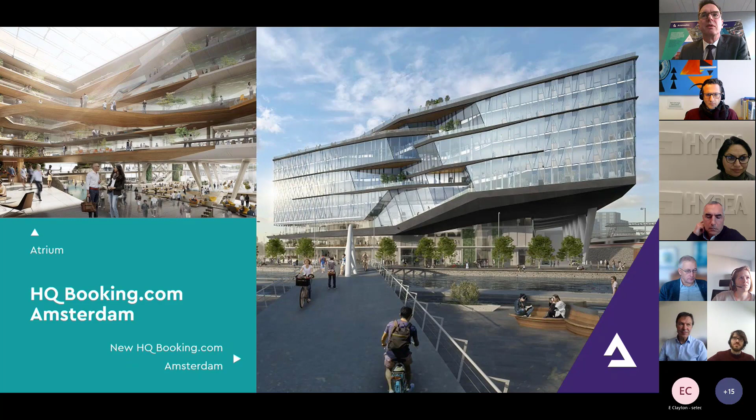And a bank, the Triodos Bank in Zeist. This is a timber structure, this is one of them. It was already one of the most sustainable buildings in the Netherlands. It is surpassed by different buildings at the moment, mainly because they're built in wood and timber.

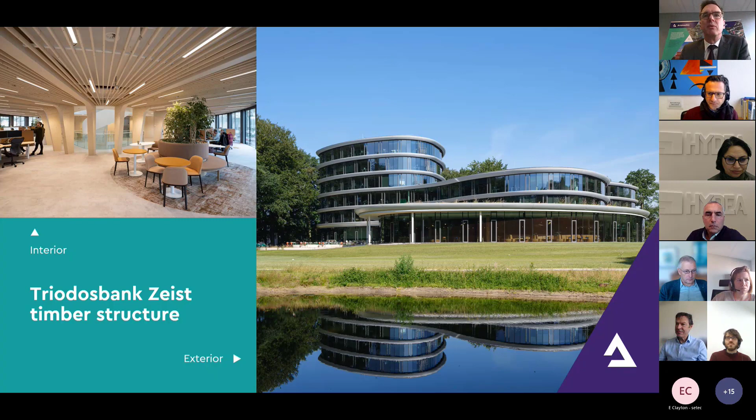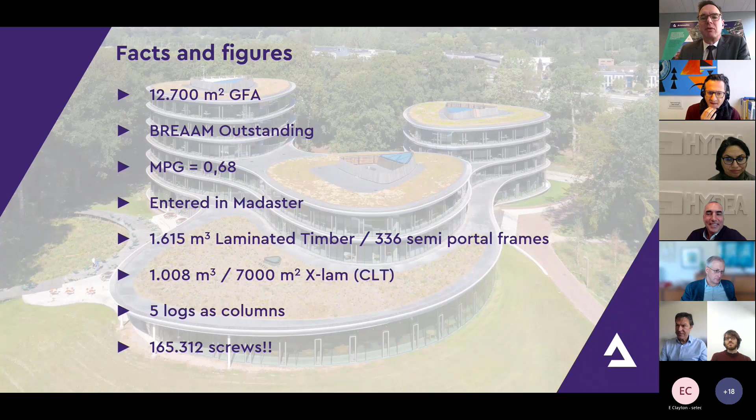Some facts and figures about this building, which will come up later as well. It's a lot of wood, but it's also because it's supposed to be remountable, but it's put together with 165,000 screws. So you can think about disassembly when you have to unleash all those screws.

So what is mandatory in the Netherlands regarding sustainability and circularity? The government has set goals, and we want to transfer the entire economy to a circular economy, and that has to be completed in 2050. This means no waste after that year, and we should be halfway around 2030. We're at the moment in 2023, and I'm not sure if that's one of the questions where we are at the moment.

The basic principle of this policy is that we use the R10 philosophy. Maybe it's known in other countries as well, but it's a way to think about circularity. So with R1 to R10, R10 is dumping and landfill. The higher the number, the lower the circularity. So the first one is refuse - maybe we shouldn't build anything at all.

Rethink is can we do things smarter, and reduce - if you build something, try to do it with minimum material as possible. What we're talking about are the numbers R3 till R7. R8, of course, is also one, but that's recycling, putting steel beams - it's the worst form of reusing.

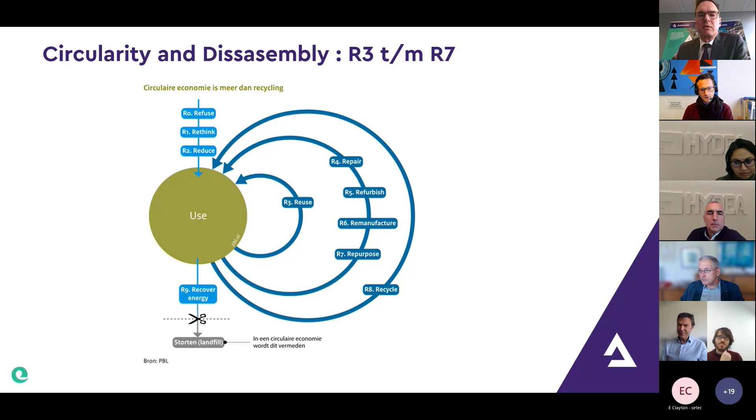Because it's bringing a steel beam to melt it down to make a new beam. But you can imagine that reusing a product or component in a building without adjusting it is the best way to do it. And R4 to R7 are different grades of reuse, with adjusting the product a bit or more.

What sustainability goals have landed in the building code? So the code that we need to meet to get a building permit. The first one is energy consumption - I don't want to say too much about it because it's not my field of expertise. But for new buildings, they have to be BENG buildings. BENG stands for almost energy neutral building - bijna energie-neutraal gebouw in Dutch.

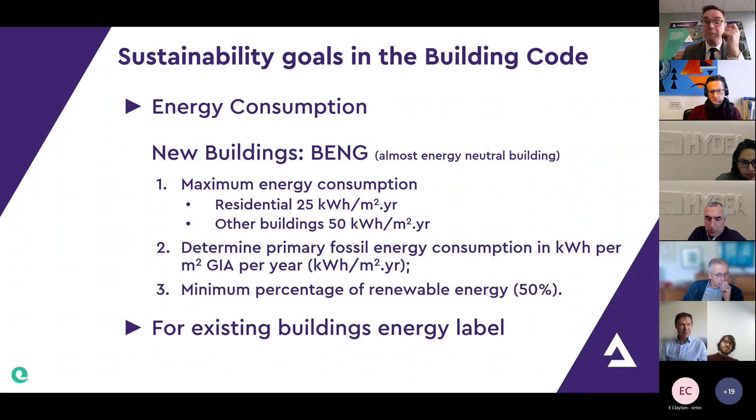This means that for residential buildings, the energy consumption must be maximum 25 kilowatt hours per square meter GFA per year, and for normal buildings it can be double. You need to determine the amount of primary fossil energy, and you have to have a minimum percentage of renewable energy, 50%. Most of the time it's PV panels in nowadays practice, but also energy from windmills or biomass, for instance. For existing buildings, there's an energy label, mandatory, but not going into that one.

And if you look at material use, that's where we, as a structural engineering company, come in, and also a project management company come in, for new residential buildings and offices. Other buildings get their own requirements later, is an MPG of 0.8, and I will explain later what that means.

But MPG is key and stands for the environmental impact of performance of buildings - oh, I see there's a typo. So it's how good the building performs on a sustainability level. But in 2030, this should be 0.5, and there's even the wish to bring it back to 0.3.

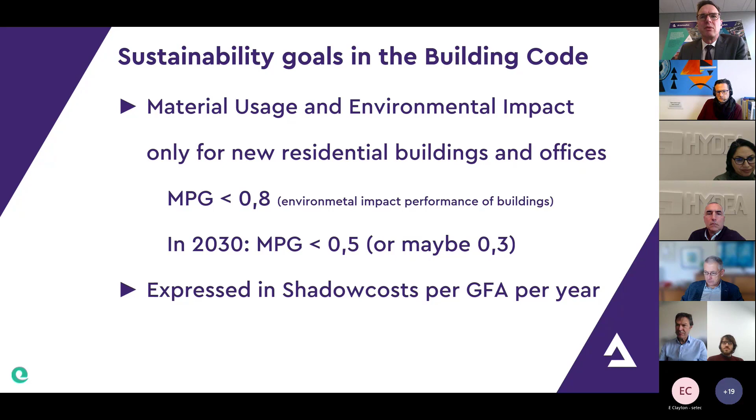The MPG is expressed in shadow cost per GFA, per gross floor area, per year. To get a rough picture about what this means, an MPG of 0.3 means that the building should be entirely made of wood, except for the foundation probably, with bio-based materials. Otherwise, you're not going to make it.

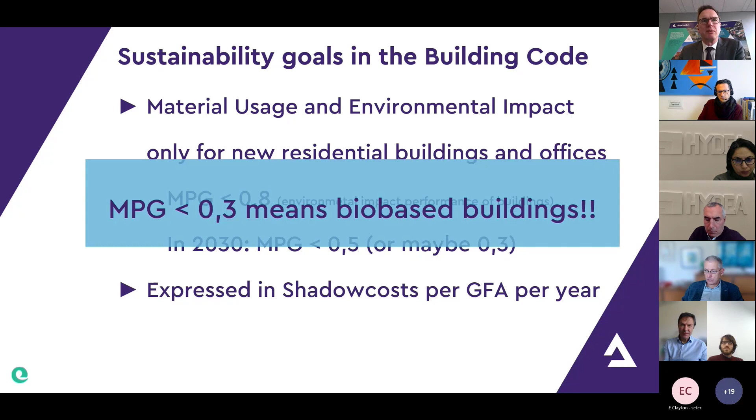So shadow costs are actually the costs to express the sustainability, and these are the costs to prevent environmental damage. So what if you make a door, for instance, or a steel column? What's the environmental impact of making that column and bringing it to the building site, construction site, and demolishing it?

It's expressed in the MKI, a unit per kilogram or meter, and you need a life cycle analysis according to a European standard to get that number. With that life cycle analysis, you can also produce an environmental product declaration, also according to a European standard. So there are European standards already which you can use to determine the MKI.

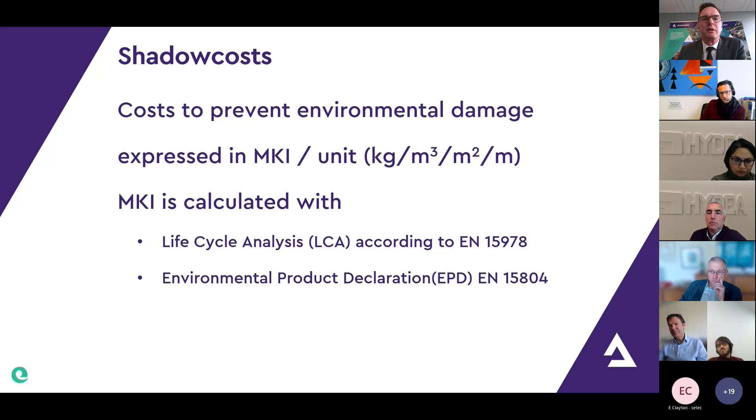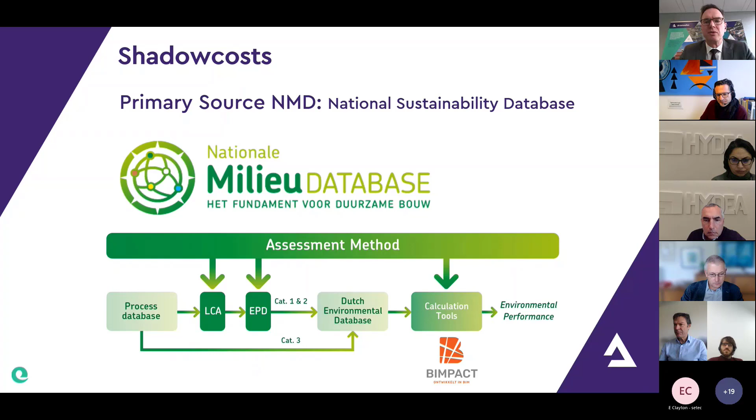You can imagine that all these products or materials need an MKI. That is what we have done a few years ago, I think already 10 years ago, is that we made a database of all these products and their MKIs. It's called the Nationale Milieu Database, the National Sustainability Database, roughly translated. What it does is that a company, a supplier that has a specific product produces an LCA and EPD and enters it into the environmental database. You can use that number together with the amount of that product you need in a building to determine the impact of the product. Therefore, we have calculation tools. We used, shortly, BIMPACT, and what it does is that it's a calculation tool to determine the MPG.

Some remarks on this national database, because the database is not complete. This has a few reasons. The Cat 1 and Cat 2 materials, they require an LCA, and that costs money. Many suppliers don't have the intention to spend that money on such an LCA. So most of the time we're working with Cat 3 materials. There's no LCA, and this gives a very generic, conservative value. So if you have a building with only Cat 3 materials, the MPG score will not be as good as it would be, even if the same material with the same sustainability performance has an LCA - it will automatically score better. So it's a sort of an incentive for suppliers to perform these LCAs and EPDs, but the suppliers are still very reluctant to do so.

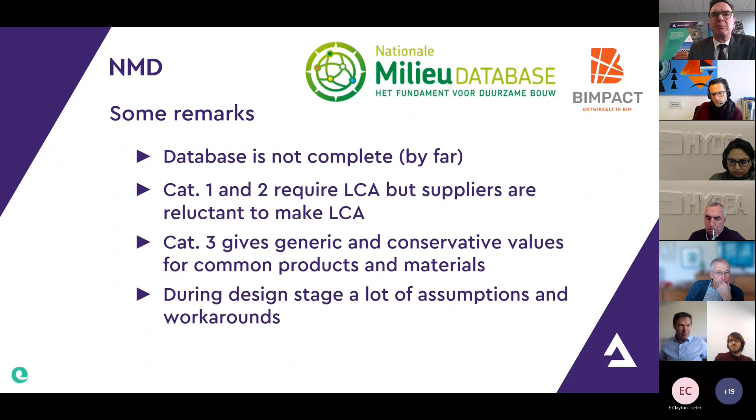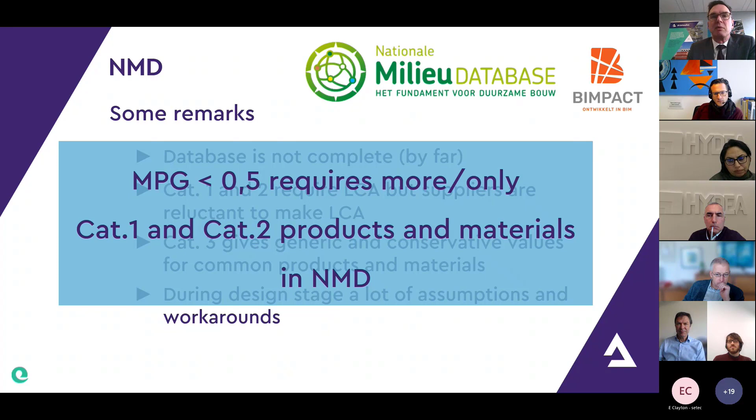This gives a bit of a problem during the design stage, because we work with an incomplete set of data to determine the MPG of a certain building. But getting back to the wish to get, in 2030, an MPG lower than 0.5, we actually require more, or even all, of the products to be in Cat 1 or Cat 2. Otherwise, you can't make the MPG of 0.5.

This MPG is also used in different certificates, just as BREEAM. BREEAM is internationally known, GPR is a Dutch standard. But for instance, if you want to achieve BREEAM Excellent for the credit, you need a certain amount of credits for Mat 1. This means that you need an MPG less than 0.6, but also 40% of these materials in the MPG in your building need to be in Cat 1. So this is quite a serious demand to get the points. In this case, for BREEAM, we're focusing mainly on structure and building components. Of course there's also an element of managing and health, but we're mainly focusing on the building materials at the moment.

Another thing you can do to get the result in BREEAM Excellent, to gain enough points for Mat 1, is to put it in a Madaster. It's a building passport - a database where you can put in the building, and where someone in future times can harvest the elements from your building. So if you have put the entire building in a database, and it's going to be demolished, someone else could harvest the materials using the database from your building. I'm not going into that any further - I could explain later if there are any questions about it, but it's not the focus of this presentation.

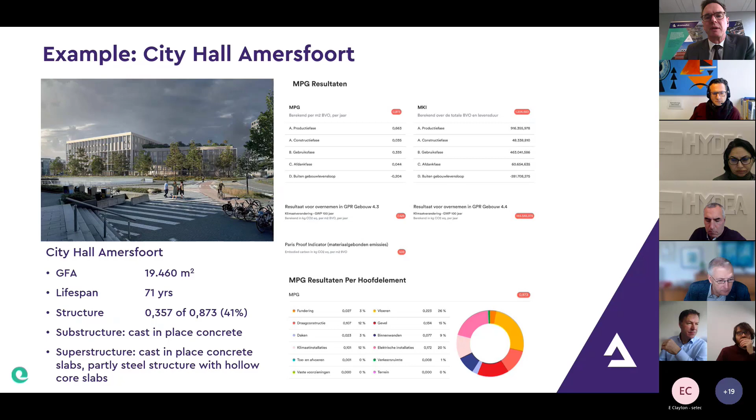This is an example for the City Hall in Amersfoort. It's a project we're working on at the moment, in the tendering stage. It has a GFA of about 20,000 square meters. The lifespan is brought to 71 years, because the MPG is the total amount of MKIs divided by the lifespan of the building and also the GFA. I hope you can read it - maybe you need a bigger screen - but the building has a substructure of cast in place concrete and a superstructure of mainly cast in place concrete slabs and steel structure, partly with hollow core slabs.

The MPG of this building is 0.87, and you can see that the structure, if you take a good look, is about 41% of the total MPG score. So for us as a structural engineer, the impact of what we do and how we design the building on the MPG is quite big, and they're always looking at us, of course, if they want to bring down the MPG. But as you can see, cast in place concrete is not really the thing to do when you want to lower the MPG.

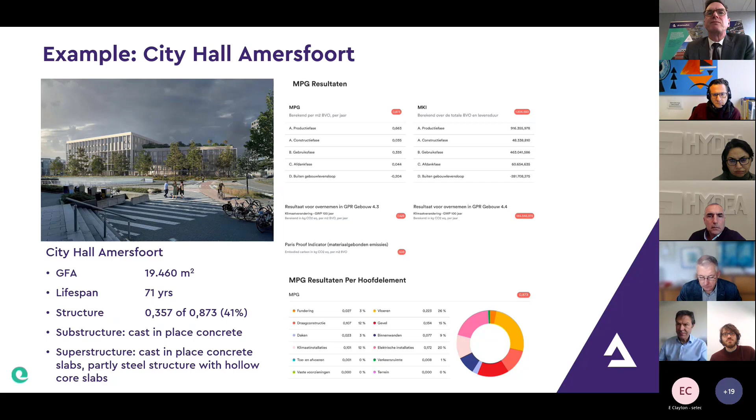Another example is a building with a very high BREEAM score. They need 94% BREEAM. That's about as outstanding as it can be. So that means that the MPG of this building should be lower than 0.6, and 40% of it should be in category 1. The substructure, and that's mainly the basement, is cast in place concrete, and the superstructure is a steel structure with hollow core slabs. It's not very big, but this has an MPG of 0.49.

And what you can see is what they have done to lower the score is to extend the lifespan of the building. So 64 is not really a common lifespan for a building. Structurally, it's 50 years as a reference period. But it's a kind of a trick to lower the score. And also here, what you can see, even on the low score of 0.49, is that 32% of the total score is structure. So again, for this building, the amount of the structure has a very big impact on the total score.

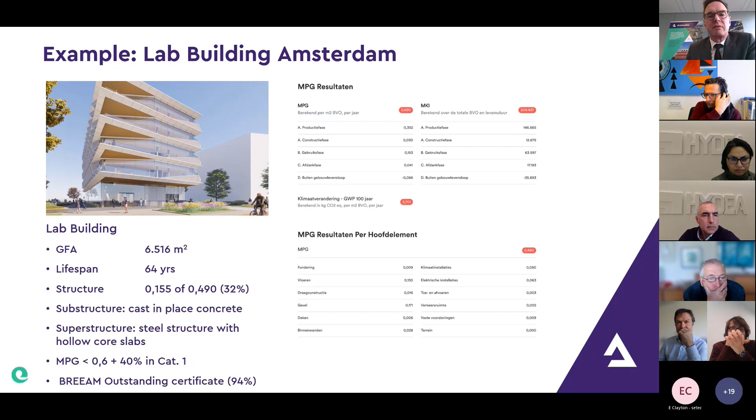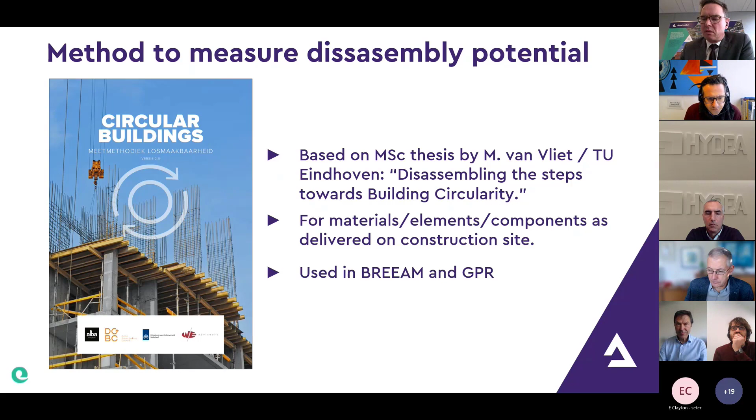So this was about the MPG, and these MKIs will come back in quantifying the disassembly potential. For this, we are using a publication that is based on a master thesis of someone in the Netherlands, and this goes for materials or elements that are delivered on the construction site. We only look at elements that are delivered on the construction site. So a full facade element with the mullions in it and the glass, you can see that as one element, and the result of the calculation can be used in a BREEAM and a GPR score. GPR is also a sort of certification type.

The disassembly potential is divided in 4 different aspects. This is in Dutch. It's not translated because that was a bit too much of my time for the last day. So I will try to explain it in English and translate it while I'm talking.

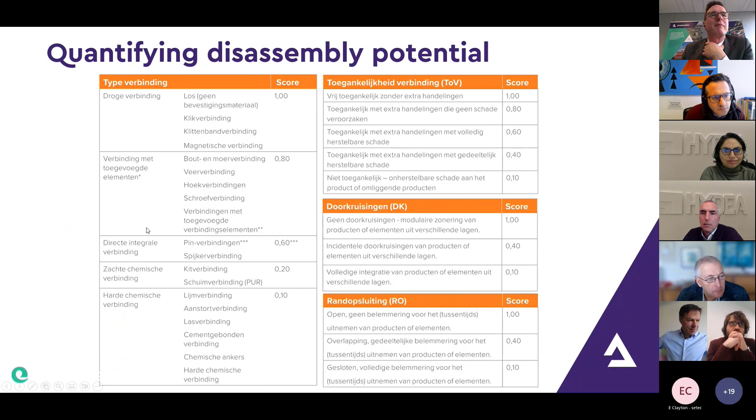The first one, of course, is the type of connection. If you look at disassembly, the highest score you can achieve is 1, the lowest score is 0.1. If you look at the type of connection, the highest score you can get with magnetic connections or click connections. Sorry, I'm going too fast. A bit lower are the bolted connections, or connections with screws, connections that you can easily undo. The next category are connections with nails or dowels, for instance. You need some extra effort to disassemble. Then soft chemical connections like kit or polyurethane foam that is used also in the Netherlands, and you have these hard chemical connections. That's the lowest in the score. That's about gluing, welding, cementitious chemical anchors, cast in place concrete. So that's the lowest score.

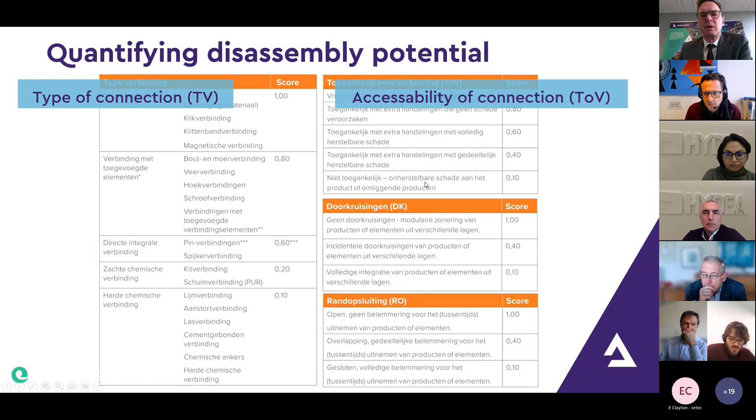The next one is the accessibility of the connection. So you can score the highest points if you can easily access the connection. So if you don't have a ceiling and you can see the structure immediately, for instance, then that's the highest score. And when you go down, it takes more and more effort to access the connection. So it is about if you can recover the damage completely, if you can partly repair the damage, or if you can't repair the damage. If you put the connection behind plasterwork, you have to demolish the entire plasterwork. So it's the lowest score.

Next ones are crossings. If an element is crossed by another element, and it takes an extra effort to remove the crossing element to disassemble the original element, you also get points. So we have no crossings and fully integrated crossings. I have some pictures later on to give as an example. Then we have the confinement of the element. So if the element is confined within other elements, and it's uneasy or easy to extract, then you also get points.

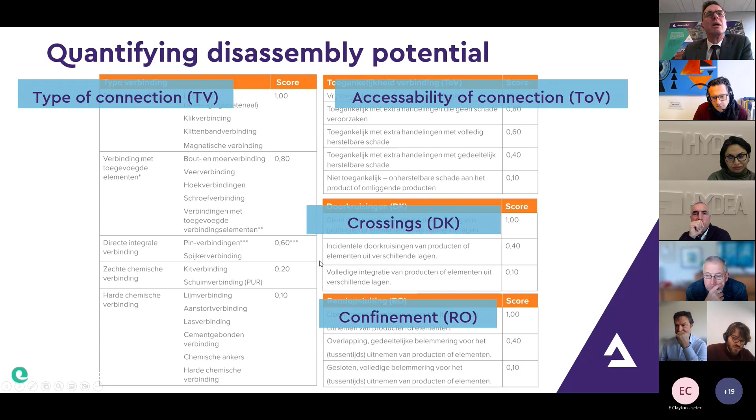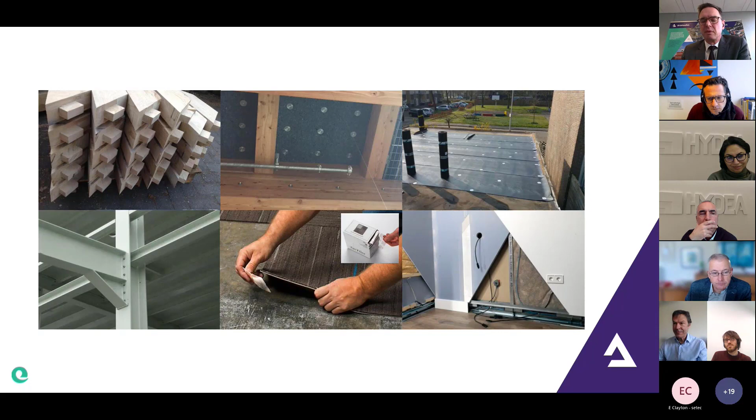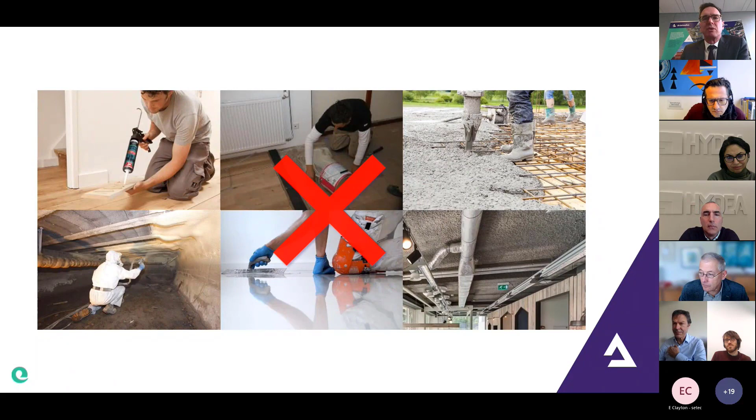So for instance, if you look at type of connections, if we go to the left bottom, you see a steel structure, bolted, easily accessible. So that scores very high. On the other side, it's about roof covering. If it's not bituminous, but it's mechanically connected, then you score higher. And even so for a tapestry, and of course the connections in wood, the pin connections, are better than, for instance, these kinds of connections: gluing, kitting, pouring, and spraying. These are all bad scoring types of connections.

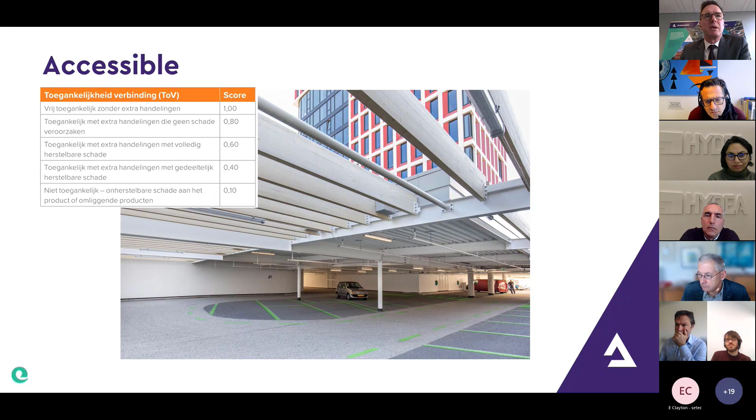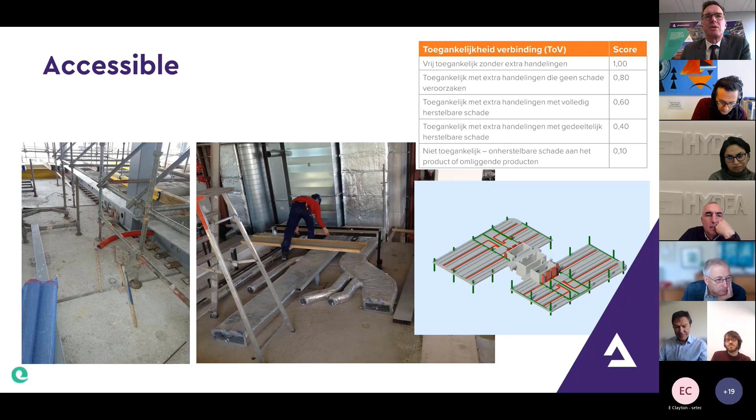Accessibility: as you can see, these steel girders are easy to access. So this is a relatively high score. You can dismantle these beams without any problem. So this is a good one. And this is the same project, but a different floor. The HVAC installations are on the floor, fully integrated in the floor. And these are quite difficult to access, because you have to remove the computer floor, you have to remove all kinds of other stuff to get to the ducts and change the ducts. So this is a bad scoring element.

When you think of crossings, you have things like this. You have, for instance, a wooden slab, and the MEP is fully integrated in the floor itself. And if you have to make a change to these MEP installations, then you have a big problem, because it costs a lot of time and effort to change them, to remove them.

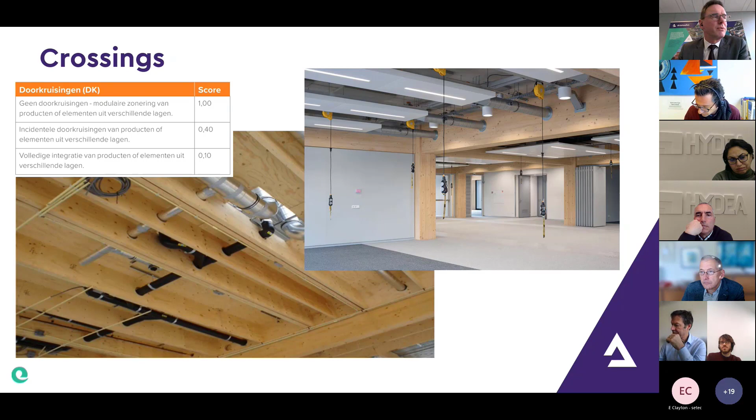On the top right, it's a bit less serious, because these are incidental crossings. But still, you have to remove them. What's important in these crossings is that we have to work with the layers of Brand. I'll get back to that later.

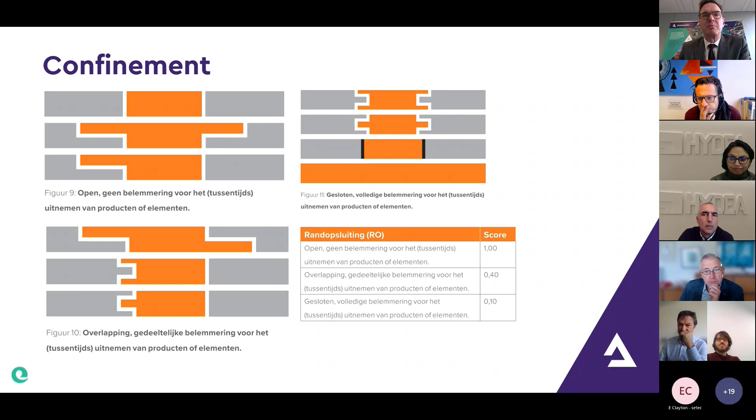Even if you have a floor with hollow core slabs, and the joints are filled with concrete, then you have to see it as a fully closed element. So it also scores the lowest points. If you have these four scores per element, then you should add them up according to this formula, and you get the disassembly index per product.

And if you take all these elements together, you have to weigh them with the MKI, and that's where the MPG comes in again. You have to weigh them so the elements with the highest impact on the MKI, the MPG, have the most impact on the total disassembly score. And at first, you calculate the disassembly index per layer of Brand.

Maybe people know the principle of these layers of Brand: a building is divided in several layers. Structure is one of them, but also the skin, the facade, the surfaces, MEP, the space plan, the non-bearing walls, the office furniture and stuff, and the people, of course. And if you keep these layers separated, because all these layers have a different lifespan, the structure has the largest lifespan, then you can remove these layers easily without interfering with the other layers.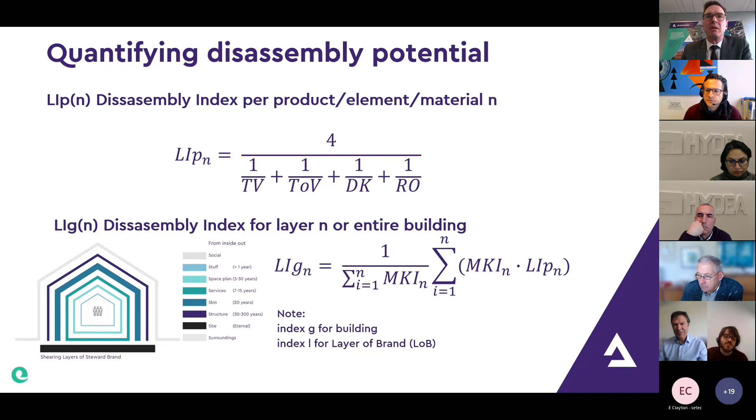And in the end, if you put all these layers together with the MKI score, then you have the disassembly potential of the entire building. If you look at the structure, or the core and shell of the building, for structural elements the highest feasible value is about this one, because we're not used to gluing, or using magnets to keep our beams and slabs together. So the bolted connection is the least we can do. So 0.8 is the maximum score.

Accessibility and crossings we can manage with the other parties, but for confinement of structural elements it's quite complicated to get a higher score than 0.4. So it's good to realize that for structural elements, which should have a certain integrity and durability, you're not going to manage a higher score than 0.7 per element, also because of the way of calculating. The lowest value has the highest impact. So you want to keep as far away as possible from 0.1. But for a concrete slab in situ, it's quite hard to keep it from 0.1.

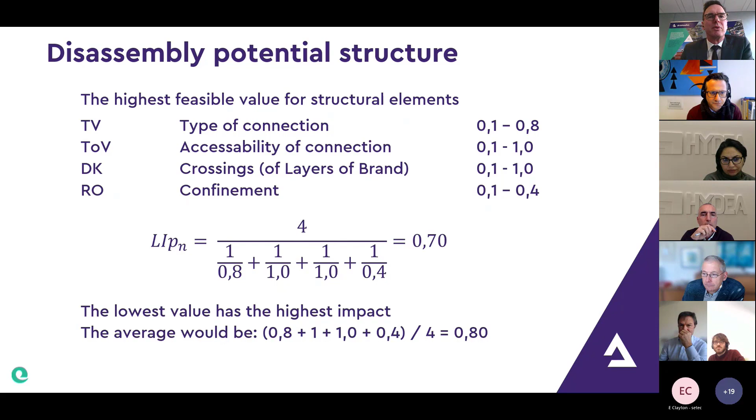Also, this way of calculating is way too much work for all these building elements. So from a practical point of view, they only take the elements with the highest impact. For instance, the structure has a high impact on the MPG. The facade, which doesn't have a really high impact on the MPG, you don't have to take into account. So in the end, you see that only a few elements have a high impact on the building's disassembly potential.

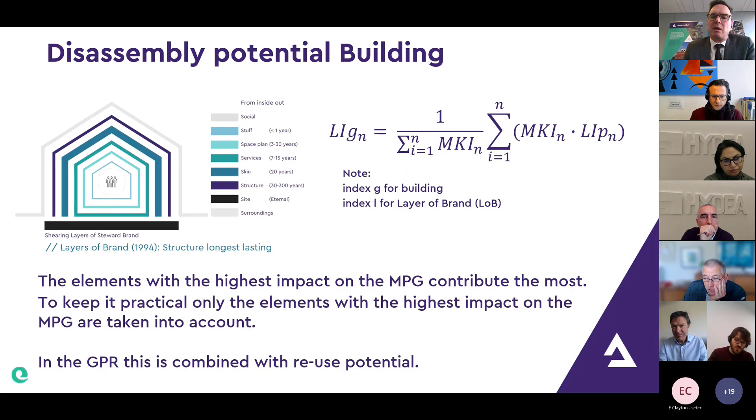But what they also do in the GPR, that's like BREEAM, another way of certification, they also combine it with reuse potential. That's quite interesting, because it could be very easy to disassemble an element, but if you're not going to use it, there's no point in disassembling this material. So this is also a nice practical addition.

So I'm about to end the presentation. Because all these things come together in this project, together with an architect and an MEP advisor, we have won the tender of this project. They're aiming for an MPG of 0.5, and also 40% of the material should be in Cat 1. A disassembly potential a bit larger than 0.4, and also 30% of the material should be reused.

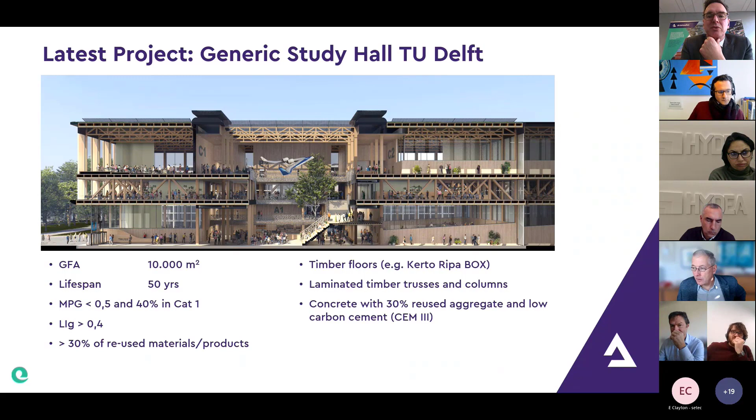So this means for sure that if we're going to meet these requirements, we're going to need timber floors, laminated timber trusses and columns, and also concrete with reused aggregate and low carbon cement. Otherwise, we're not going to manage to reach the 0.5. That's about it.